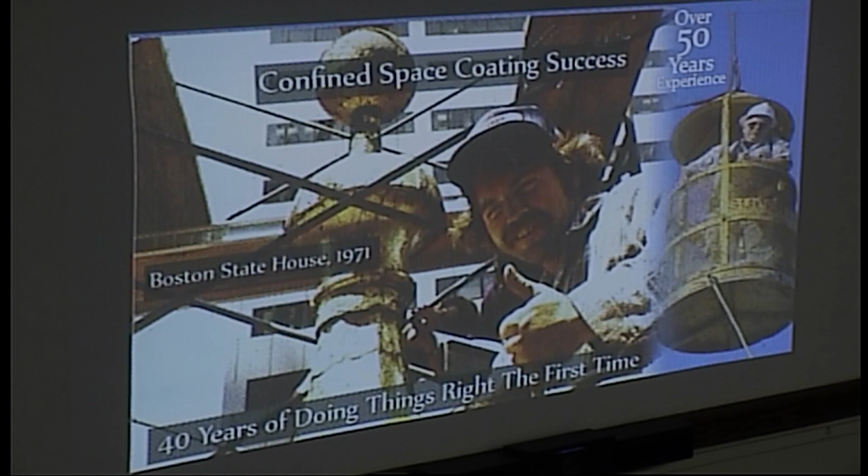So I did the Wellfleet Church, I did a bunch of churches, I did work in the old State House, it's all over the place. I was 24 in that picture. On the other side, that's waterproofing the outfall behind the State Police Barracks on the Pleasant Bay Passage. It was just pouring water, and we stopped that. It was 85 feet deep and 55 across. Next slide.

What brought us here tonight was the problem out on Swifts Beach. I was asked by Mr. Campina, Derek Sullivan, and Jim Gibberti to try to come up with a better way to lose the pumps. We had many meetings and talked about trying to figure out how to get away from the pumps. There was no way, because the stumbling block was asbestos pipe. The minute people hear the word, it's just no, don't touch it, don't go near it, don't have nothing to do with it.

I came up with what I thought was a better way, and we approached the state with some help from Senator Pacheco and retired Senator Goldman, but mostly Senator Pacheco. They agreed to give us an audience at least, and once they saw what I had come up with, they became very interested in helping.

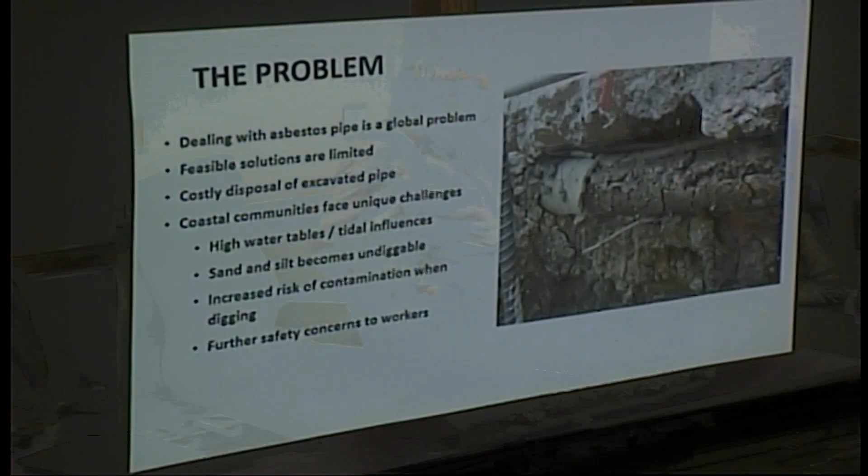We decided to keep it quiet in a circle until I proved that all this stuff worked. It wasn't just in theory. None of the equipment really existed yet, so I built all that equipment. I'm gonna pass this around.

There's no asbestos in this at all. I did this over in the yard where I'm doing the marina, but I did drill holes in the ground and make trenches, fill them up with muddy water, and had to figure out something that would simulate the asbestos pipe. I'm gonna start passing this around.

When you look at it, it looks like pencil marks. That's a fluorescent light bulb tube. That's the closest thing I could come up with that would shatter and act like the asbestos is going to act when we start to work on it.

As you can see, there's the new pipe. That would be your new pipe. I'll explain to you how this whole thing goes together now.

As we started looking into it, we had to satisfy all the rules the state had for dealing with an asbestos pipe, so it took a long time. That's why some of you probably see me out there on early Sunday mornings and different times of day, just walking back and forth, looking at the thing and trying to figure it out.

Once I got the idea in my head what I was gonna do, I started working on getting a resin chemical blend that would be non-toxic, but would trigger by water. I got it to do that, and that's common in our industry, as Bob will tell you. But the trick was getting it to do it on demand, not when it wanted to, and I was able to do that.

So I made a model that was nowhere near as good as this. If anyone wants to see the old model, I'll show you. And the state thought it was the best thing they had ever seen. They said, go forward and keep figuring it out, and we'll try to help.

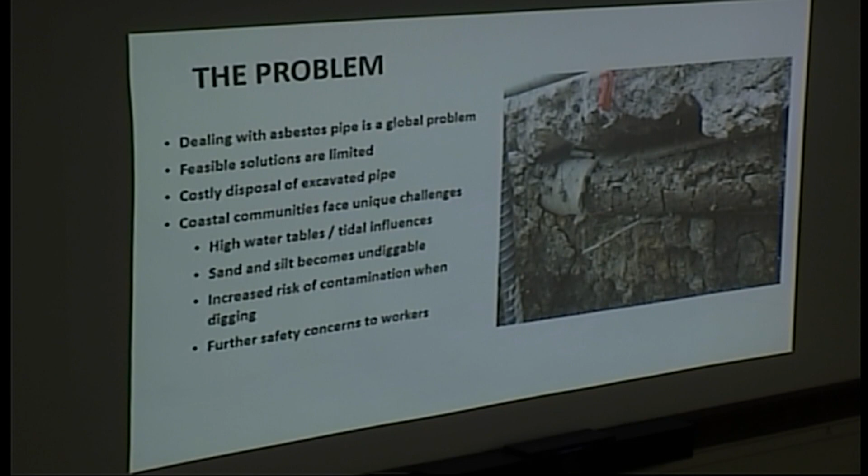So the way this worked—next slide, please. Oh, that slide you're looking at, back up one please. That slide you're looking at there, we had to hydro excavate out there to see where these utilities are: gas, electric, water, and all of that. Some of you might have seen that giant white truck out there.

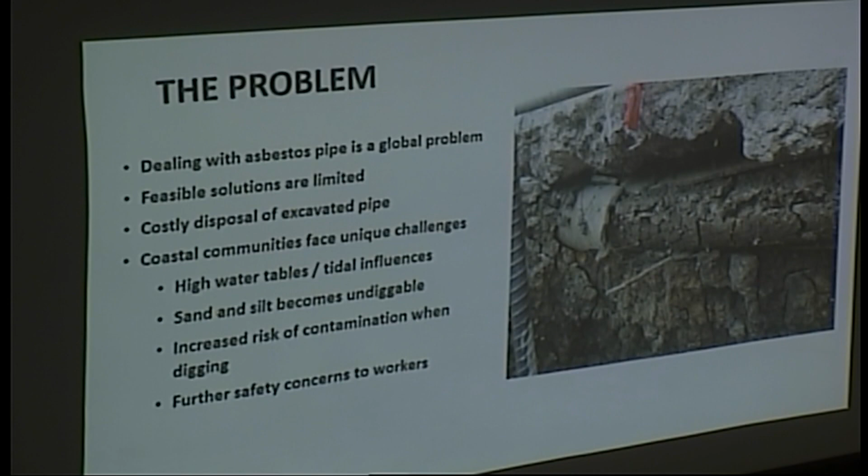Well, that truck was incredible. We went down and found the water lines. We found your water main from 1932, so I'm glad to tell you you're gonna be getting a brand new one. We found the gas mains, and another small water main that's also gonna be replaced.

Not to get the cart before the horse, but the bottom line is, when this is done, if we get it approved—and I'm sure we will, because we have to do it as a community, a solid community trying to solve a problem—then I think the state's gonna help us. We've got some heavy hitters trying to help us, and we believe they'll help us very quickly.

Not only will this solve our problem, it's gonna solve a problem worldwide. It's everywhere. People are in shock when they find out drinking water is going through asbestos pipes all over America. The hard fact is, about 40 to 60% of all the water pipes in this country are made out of asbestos. It's a huge problem, and they've never been able to deal with it.

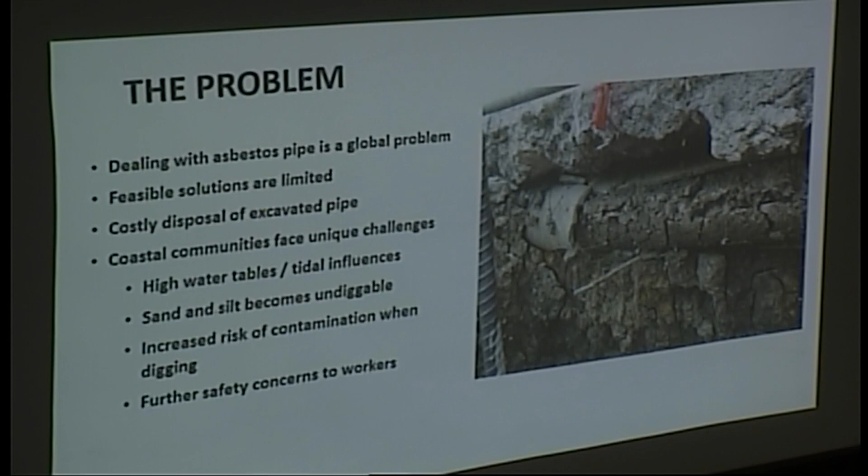Just yesterday, I was in the water department here in town, and I heard those guys talking. They were complaining that they just removed 3 small pieces, and it cost almost $5,000, and they weren't there 2 hours. But that was not really what it cost.

That was the beginning, just to get it out of the ground here. By the time they ship it for processing, handling, and getting rid of it, it'll probably be at least 3 times, if not 5 times, that amount of money.

Next slide, Derek. This was a concept drawing my son put together, and it's the way you want to do this. You don't want to go through the pipe and break it all up. You want to keep it in as few pieces as possible, but capture any place you're going to cut through the asbestos pipe and capture all those scrapings. So we figured out the best thing to do would be to scribe the pipe and build a head that does not exist. From ground up, we had to build it, and it's already built. That was a big order, but we got it done.

So there's no cutting, no breaking, anything? There's no cutting, there's no sawing, none of that. You'll see that a little bit later on in the presentation.

But this is worst case scenario. Say if the pipe was all broke up, this material goes crazy when it sees water. So anything that does scratch or come off as we're going is falling into a pool of this. As the head's going through scribing it and moving it apart, instead of breaking it up, it'll come across in 2 even pieces, just like that little piece you're looking at in your hand.

I got the idea of using the fluorescent light bulb, because as we know, when you touch them, they're gone in a million pieces. I was able to scribe that and make it break more reasonable, more like the real world. I got another piece out in the truck that I didn't bring in, but it shows that really well.

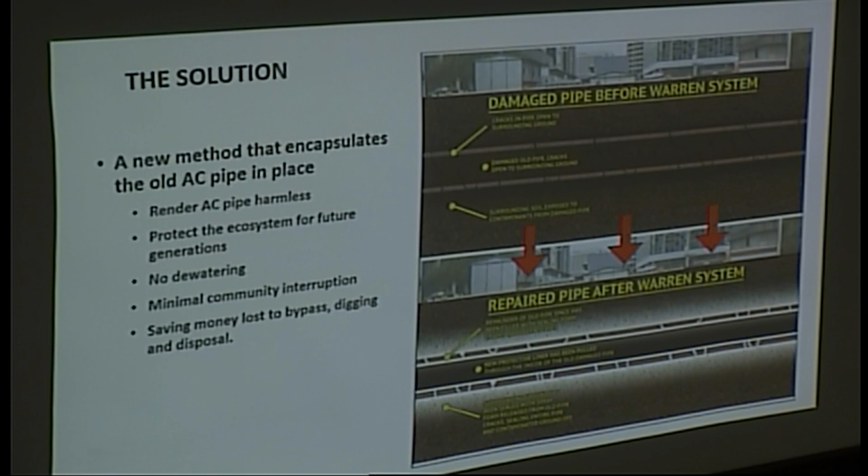So then it migrates. If there's a void or anything, it'll find it and fill it in. So all the dirt around, as you see here, that's a 1-inch pipe. But this was power washed at 3,000 PSI. This is like concrete now. That's going nowhere. But if you look right in here and push that, it's a little bit soft around that because it needed water.

It locked off out here and no more water could get in, so it stopped curing, which is good. Now it stays like a sponge, and it'll cradle that new pipe through the rise and the low, and help all the way around. The structure is going to be phenomenal, but you're not going to break this ever.

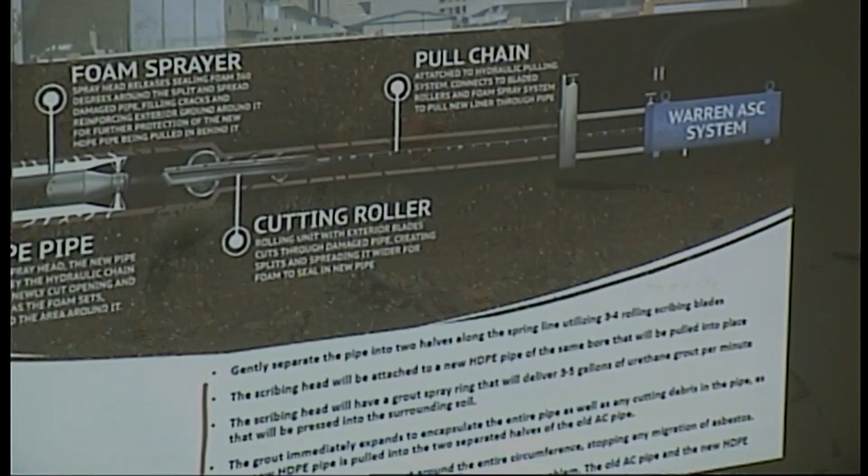So, next slide, please. This is how it works. The head is being pulled from left to right. We're going to have to dig a pit down there at Bayview and that intersection.

The pit is very expensive, crazy expensive, because there's so much water out there. But we got to get down to the depth that pipe is and a little bit below it. Then we got to create a hard bottom because there's not one out there. We bored 50 feet the other day and we still had water, and that's where it becomes impossible. That's where the sewer board and everybody looked at this in the first place and knew they had no place to turn because it's impossible. The last guy who tried out there went totally bankrupt really fast.

So we looked at all these threats and all these problems, and we figured out how to deal with that. I picked a company called D'Alessandro because I did a ton of work with them for Boston Water and Sewer and the MWRA. They're phenomenal. Up on Wharf Street, I went up there, they were down 40 feet in the sand fixing a pipe, and I said, but they are the best, no getting around it.

So as this thing comes through, the new head looks pretty much like that, but I modified it and did a bunch of changes on it to make it act like a piston. That'll be later on too, so I don't want to get ahead of myself, but that's how it's going to work. Down here on the end, the pulling system, I've designed that. It's not going to be a chain or a cable, because they'll jump up and down.

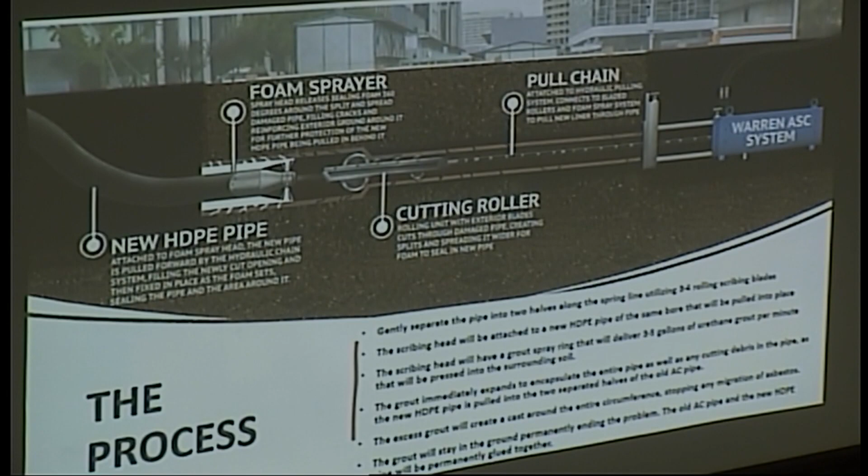Yes, ma'am. Can I just, before all this, could you address what is the specific problem? They keep mentioning a problem at One Kinko. What is the actual problem we're trying to solve here? Okay, I'll tell you what the problem is. The thing has always been leaking, ocean water pouring in, because when the last guy fixed it, it went bankrupt.

We found more of his sins yesterday when we were vacuuming it. The problem is, out about 20 feet from that manhole at Wakinko, at Bayview, when they installed it, a pipe came out of joint, so it was dropped.

Then a contract came out for my company to line it. We looked at the videos, looked at everything, videoed it and looked at it, and we decided that yeah, we can get through that and make it workable.

So we did that, and then we went out there. I made another machine that I could go in with a camera, and I made a thing out of heavy lay-flat fire hose that was the same size as that pipe. I made like a sawhorse out of metal so I could get a camera down there.

So I hooked up an air compressor, and I put some pins around where I knew that pipe was. Slowly, half a pound of pressure every 2 hours, I kept lifting that pipe until I had it in alignment. Then I shot, very similar to this, grout underneath it, and I had it almost back in alignment.

When we did that, this is interesting also - we were pounding these 16-foot long pins to go in because that pipe is so deep. I had the hole bored, I put the pin in it, I turned to get the wrench and turned back, and the pin was gone. I knew right then we were in big trouble because that pin was just gone.

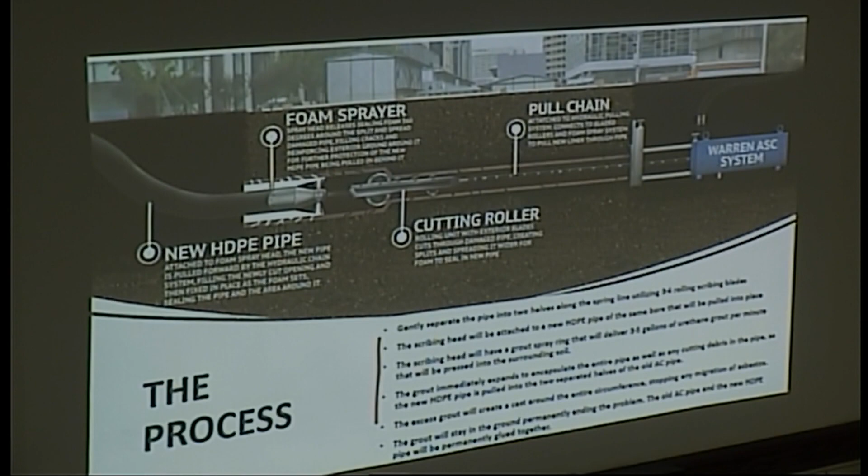I don't know. But anyway, Danny, just one thing on the old slide, just in case this picture gets anywhere: this was an older one which said cutting roller on there. That's correct, that's something clipped out of an ad. So there's no cutting roller, we have a scribe.

A roller, because if you... yes, sir? One question: is there any way the town can make sure there's no sump pumps going into the sewer?

Yeah, there shouldn't be, but there is. And I'll tell you how it doesn't happen, or rather I'm going to tell you how it's gonna happen. And it's up to them if they do it to you, but there's definitely a way, because Florida got smart. I mean, here's how you do it.

Now, this is another discussion point. Can he finish this? Another discussion for another time. I mean, we've had 3 years of trying to find a way to stop sump pumps, and we could not find a solution. Well, there's a way. People don't put smoke like that. Put smoke in everybody's house. No, no, okay, go ahead. Since you brought it up, another topic for another day. Yes ma'am, oh I thought you wanted to ask me a question.

No? Okay, so here's the solution as I envision it, and we've done a lot of work with Bob. Bob's company has been out there with us, and that's what all the noise was for the last few days, to make absolutely sure before I come in here tonight and said this.

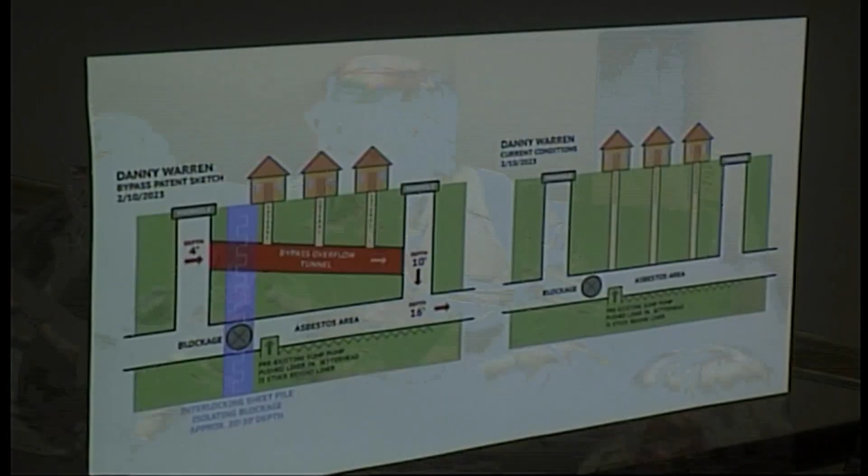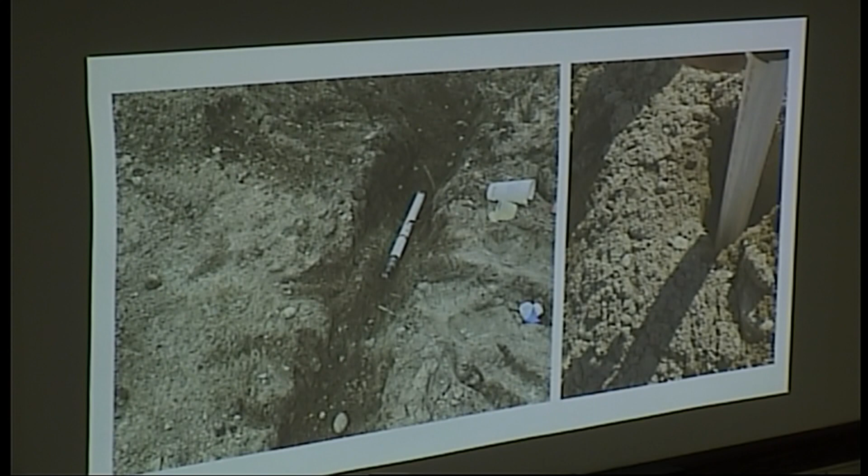This one up here, as we did it, we added it full of water and sand and rock at the same time, making sure we didn't break our light bulb after we cut the end off it. Then we had a plunger that we could put the resin to, and we pushed it through. And when that material broke, and then we broke the end out of the light bulb and the water was there, it kicked off just like that, bang, done. So, next slide, please.

So that's just another picture. I actually left one in the ground in case anyone would like to come over and see it get dug up, we will do that with you. Throw some little trinkets in there or something. Next slide, please. You got it in there, a couple gallons of water with it.

Do you want me to go next? Yeah, you can let that go. I already told them what that's gonna say. Come to the outside wall. You're gonna finish it up, so we'll go.

All right, so there's my guy, Asa. He's starting the excavation because we didn't know what we were gonna find and we didn't want to break it. And if it was still soft, we wanted to know that. So, next slide, Derek. So there it is, all excavated. The only reason it's standing there is because it's glued to the back wall. We had to fight it off the back wall with the hammer, just like we did the front wall.

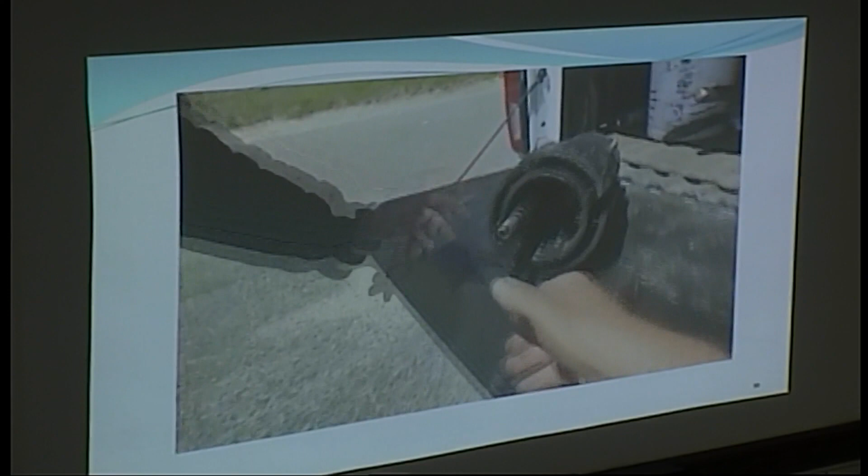So, next one, please. All right, this will play. This is the head. Right where the finger is, the new pipe will slide in and be bolted to the head, with the pulling ring on the other end. This is our port. All right, so can you back it up just here? Leave it right there. All right, so that inner ring is the size of the pipe that's out there right now.

Should I take that away from you? Oh, Jimmy, yeah, you see the picture he just put up about putting the pipe in, the picture? I can't see any of that. Oh, well, if you have your TV on, you would. Oh, I'll try that then. Okay. All right. Thanks.

I'll tell you what, it's exactly what I suggested. And Russ, Keegan said it can't be done because we don't have enough pipe. You can't start out at 4 feet and expect to get there. What's he saying? I think Peter's just saying something he had referenced before, and it was an idea that he had, so. Yeah, and, oh, I understand. They didn't think they had the slope to get the flows.

And I went out there with Derek's permission, and I went in the manhole properly, and I bored some holes, and I did some measurements to see where the water was and to see where that pipe really was, because there was some crazy information floating around about the pipe. So once we verified that, I hired a man that's a great engineer who used to sit on this board. And I said, here's my calculations, Mac, what do you think? And he came back and said, absolutely, it works. So then I told Derek that this guy is an expert, no ifs, ands, or buts. And I had Bob look at it, and he said, this works. So we had the slope, no doubt about it. So now then we can lay that new pipe in there, get the slope, get everybody hooked up and go.

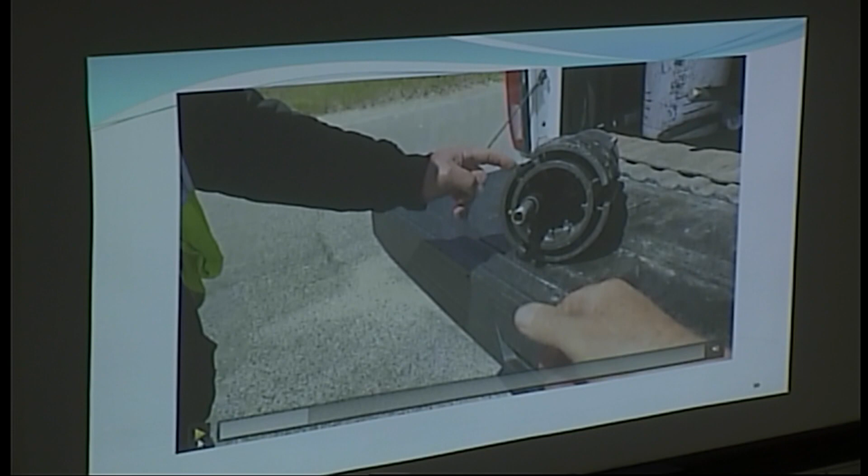Can you show it a little bit more, Derek? So I can turn the machine? Just tell me. Ring on the other end. Stop it. Oh jeez, that's so much for tech savvy.

Okay, I'll be right there. Can I ask a question? Yes, ma'am, very simple.

The grout is to keep it from leaking, is that right? No. What is the grout for?

When you're scribing, okay, this is an asbestos pipe. Right where the finger is, the new pipe will slide in and be bolted to the head and be pulled through with the pulling ring on the other end. So now, when you're scribing, you want everything to fall back inside the pipe because that machine is pumping that grout in. It's just like syrup, it's not going to get away from it.

Then when you crack the pipe, all that grout's going to be exposed to the water and it's going to wrap right around just like it did this. And any asbestos that's on the outside of this dirt, because you can guarantee your life it's out there after all these years, it all gets encapsulated.

Now, this was power washed at 3,000 PSI because I didn't want a bunch of stuff crumbling in here tonight. This was out like this before I power washed it. So everything gets caught. Now, also in this model, we took regular insulation and cut it up and sprinkled it in there like it was asbestos to see what would happen with the dirt. So that's what we're trying to do.

So that's what got the real attention and assistance from the state and the DEP was, my God, they're going to stop having to dig these pipes up and pay millions and millions of dollars to get rid of it. I'll tell you now, if you try to get rid of all the asbestos down Waukegan, you'd be in shock of what that would cost. Every house out there ain't worth what that would cost.

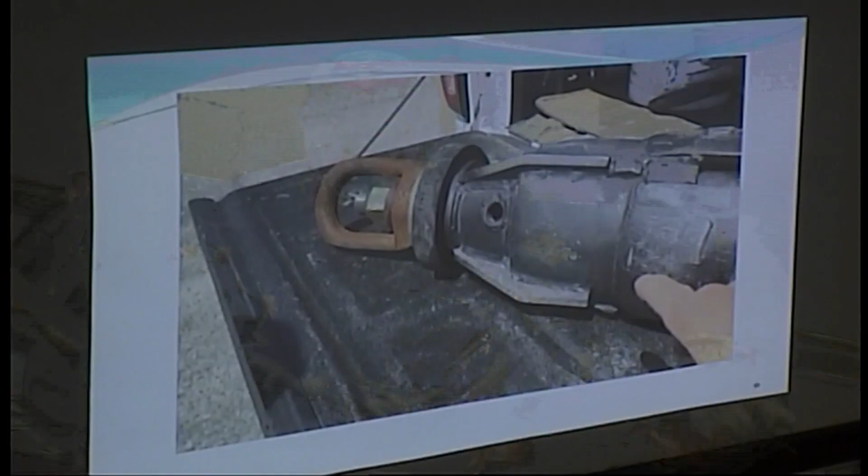And that's the truth. So now you can see the scribes on the side. That's special steel, and they are sharp like you wouldn't believe. So we're going to be pulling slow, and it's going to gradually cut it and just push it off to the side. And that grout's going to be getting out, locking it up as it goes.

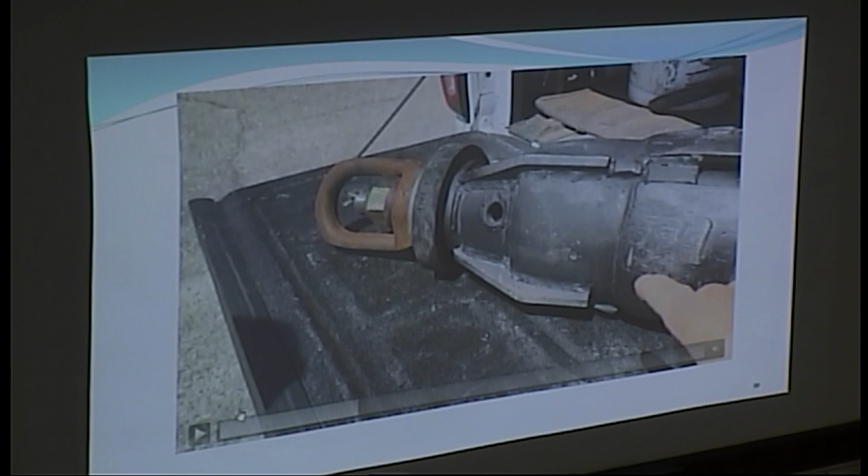Let it play again, Derek. And towards the back of the machine, I've got water ports coming in. Port for the grout, there'll be ports back here for the water, and that's our pulling ring right there.

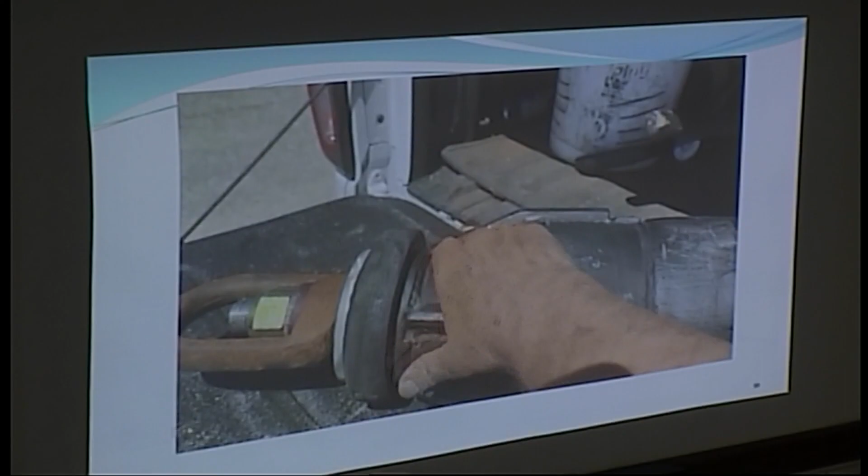Stop it right there, Derek. These scribes will gently... sorry to do that. I've got the touchpad on this, so let me try and use... oh, that's okay. And another question, please?

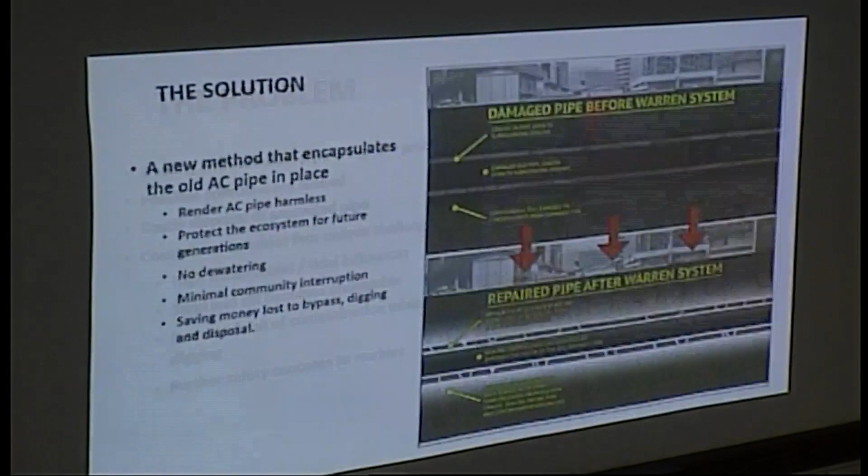Well, you saw the slide that talked about the road being torn up. How long will Waukegan be closed? Okay, we believe with what we learned this week, on that first stretch from the curve to Bayview, we think that's going to take between 7 and 9 days.

But you also have to consider, we're going to be replacing, that's just to scribe the pipe. We also have to lay a new sewer, which will take about a week, and also a new water main in that area, which will take about another week, so I would say about a month total. So you're going to have to lose the use of Waukegan for a period of time.

Better than having pumps. But that's just between Bayview and the Swiss turn, not the other five streets, so you will have access around and can get around. We'll park up the street and walk. We'll work it out, sorry, that's all right.

You want to go in the corner? You want to try again?

So, if you look right behind the rusty ring, the black thing, that's a rubber gasket we had made in record time, and now those ports right there is where the resin's coming out. You see that cut out between my two fingers? That's for another rubber ring, and the resin's gonna be coming out under high pressure. Those things will be torqued down to take that pressure, which will help push the pipe away without breaking it as we move through the line. They'll also trap it so it can't go forward or backwards, so as we're moving forward, that acts like a piston and drives that stuff even further out into the dirt. We've got it figured out - how many pumps, how much pressure, everything we need to make this happen.

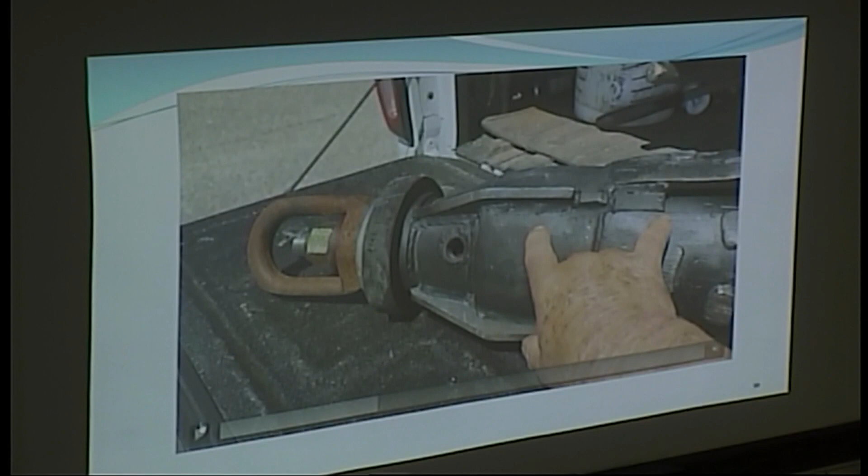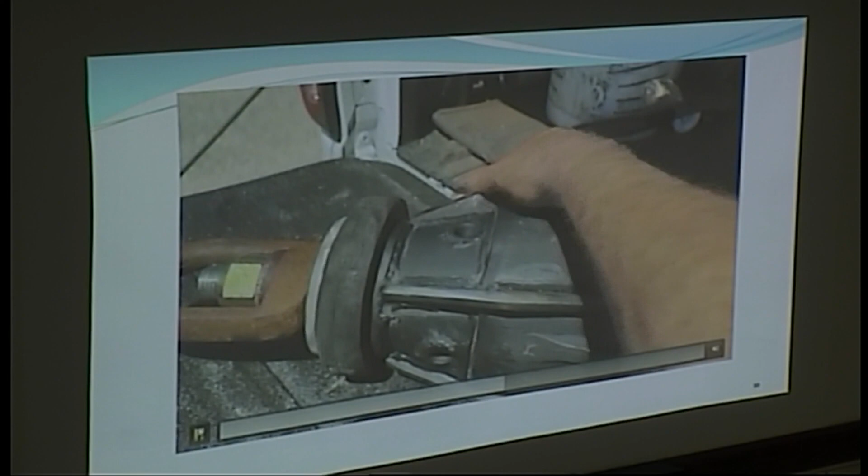Next slide, please, or a little further on this slide. Back here for the water, there's our pulling ring right there, and that'll come through, and these scribes will gently cut the pipe as it goes up, increasing a little bit as it pulls, so there'll never be any real stress on this. I said cut, but I should have said separate, because see the way they're angled? As it pulls, it'll get deeper but keep spreading it apart. By doing it that way, you're not creating a bunch of stuff in the bottom of the pipe, it's pressing it to the side. That's the number one thing - it's not cutting it, it's scribing it. Correct, we're scribing it.

It's so deep in the ground, why does it matter? I'll tell you exactly why it matters. Believe it or not, there are people that believe that incredible smart asbestos fiber is gonna find its way to the surface and kill somebody. The law is the law, and they won't budge. There's a town in Florida, right outside Orlando, that said enough's enough, we're just gonna do it. So they went out and pipe burst at 35 miles. Now they want to condemn the entire community in town. Oh, it's a horror show.

Yes, ma'am. So you can't just encapsulate the old pipes with some wrap or something and then lay new pipes in it? You can absolutely do that after you've dug up the whole street, 17 feet down, bypassed and overpumped the Atlantic Ocean - you just can't. It's gonna cost a fortune to do just that, so this is more cost effective.

Let's put some numbers on it, so you can really understand. To build the pit for just that one stretch, just the pit, it's gonna cost $350,000, and you need 2 pits. Has this been done before somewhere? Yes, practically everywhere - but not with asbestos, it's been done with iron pipe, clay pipe, concrete pipe. This is really important that everyone understand: the town had no choice when they were looking at this, because of the law, and we still don't have the law changed. Everybody in this community can help change a law that's gonna change the world. There's no ifs, ands, or buts about what I'm saying.

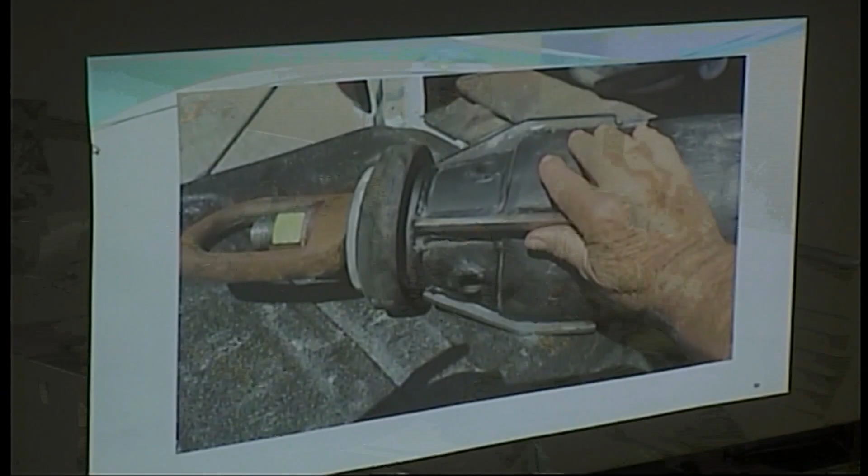Let's get off this slide, because I don't want Derek to get technically flipped out over there. So I think we're done with that slide.

What was your question? So when you're talking about total cost, it'll probably still be less than the original. It will be less, yeah. And here's what you've gotta remember.

The worst street you've got out there is that street. As we go up, the costs are gonna be much more controllable. And the other thing is, once people stop being afraid.

Here's the one snag I'm trying to deal with. The reason the costs are gonna be less is because the pipe is shallower. So when you're creating that access pit, or launching pad and receiving pits, you're down 17 feet, the pipe is down 17 feet. The sheeting to support those walls has to go down 35, 40 feet.

Correct. So when you get down all the way by Murphy, the sewer pipe is only 8 foot deep, so that sheeting can be a lot shallower. Right, and you have much less influence of the tide trying to destroy you.

But here's what to remember, the price tag, all the electrical lines are gonna have to be shielded, some gas mains are gonna have to be moved. That's all, and the town's already got all of that underway, they're pushing to get this stuff done. But at the end of the day, it's still gonna be less. It's gonna be gravity forever.

Did you want that out? Was that the end of it? I just wanted that to be the end of it. Oh, okay, fine.

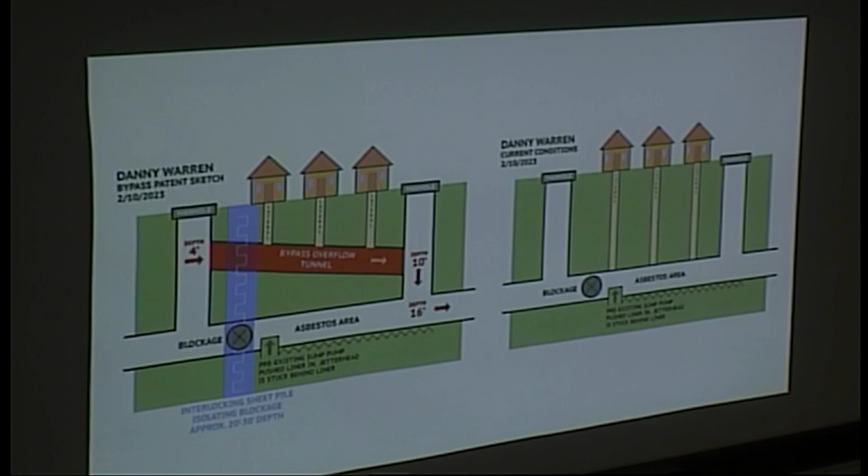I have another question - no, not a question, a thought. In doing the research, I heard that Scituate had the same situation we did, and they were facing grinders. What did they do to fix it? I think they put in the grinders. They did not - they dug it out, stuck the pipe, and assessed everybody $18,000 per homeowner to do it, rather than do the grinder pump. Was that Hull, the little island? I think it was Hull that did it.

Let's wrap this up. Danny, do you have anything else to add? Can you comment on cost to the homeowner? Is this going to be paid by the town? We don't know yet. That's not part of this discussion tonight, I'm just showing a possibility.